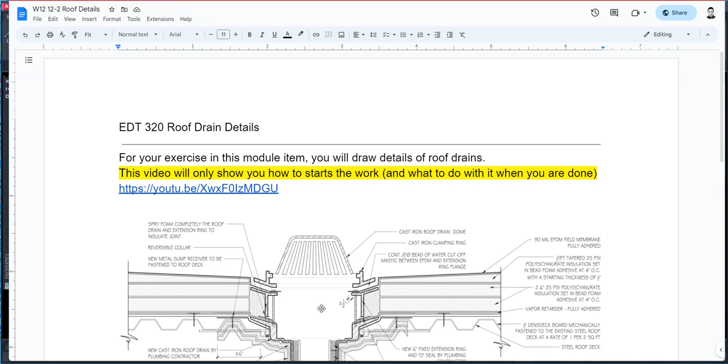Hello. The purpose of this video is to explain how to draw roof drain details by using a manufacturer's standard cut section of their drain. So, like what it says over here on the very top, this video will explain to you how to start it, how to draw it, and then how to finish it. But this video will not tell you all the things that you need to do. We've already done details when we did the structural details, and you're going to do the same thing.

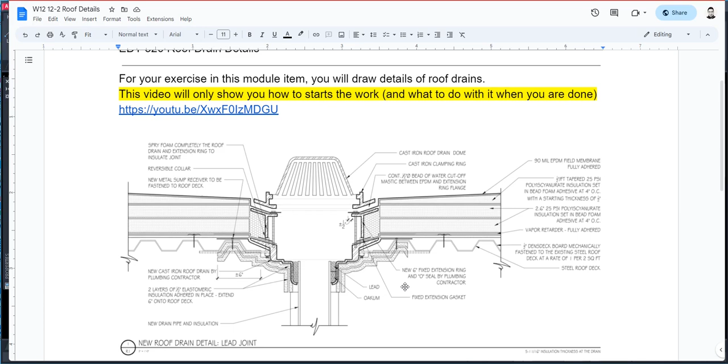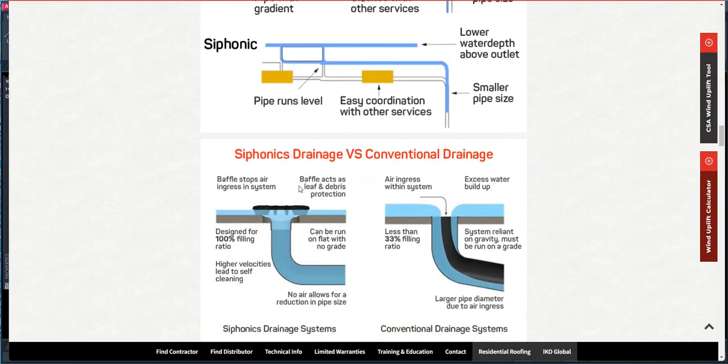When we go and look at roof drains, there are a lot of manufacturers of these roof drains. Okay, so let's look at some images here, and these roof drains need to be installed on our roof, and you can see some 3D drawings of how to install this on the roof. Let's see if I can click on this one and open it to see a better view. There you go. Here's maybe a better view.

On this view, you can see that the roof drain here is sandwiched between the roof sheeting and your styrofoam tapered insulation, and then you got your membrane. Okay, and so this is what you need to show, but we usually don't just show this detail on plan. So we can get a manufacturer's cut section and show details that look like this. So in this detail, it shows us the connection to the tube or the pipe work and how it's connected and what layers are connected to what.

As you can see here, let me click on that one too. Maybe it could give us a better drawing. Zoom in here. There you go. So you can see here, this is the manufacturer's cut section. And this one is installed on a roof deck. Ours is going to be a plywood.

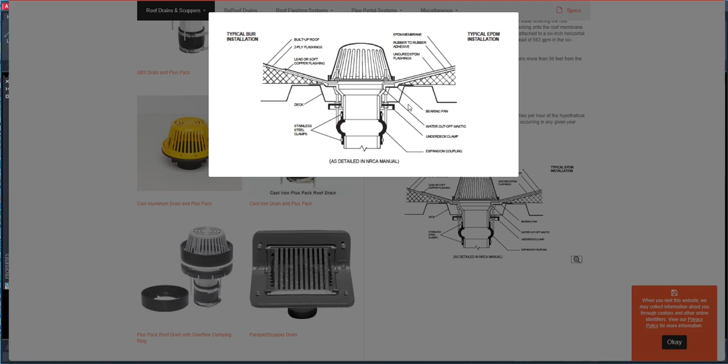Okay. And you can see that there's screws and the flange is pressing on this roof, on the steel deck, and that's basically how you tighten this. It's squeezing the roof sheeting, in this case a roof deck, and the roofing membrane here. Okay, it's called an EPDM membrane. It's an elastomeric membrane, and so that's what we use for roofing. Anyway, this is the section that you need to produce. Okay, so you can find a section to copy.

Okay, and here is a typical section that shows there's a roof deck below, and then there's some insulation on top. Then you got your flashing. Then you have another insulation on top. Then you got some rock beads. Here's another one where the drain is basically buried in rocks. Okay, so that's another one. Here's one that's exposed. Okay, so these are the typical details that we need to do.

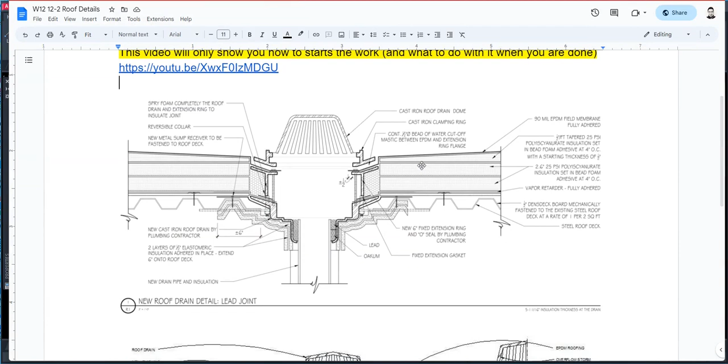All right. So going back to our drawing here, I put in some details that you can copy from. We just can't copy this roof deck because ours is not a roof deck or a steel deck. Okay, we have a plywood, and this one here would typically be our section, except that instead of saying that this is a steel deck, you're gonna say that this is your roof sheeting. So as you can see here, there's a tapered insulation here, and they hatched it like this. And then you have these three plies. Okay, so over here you have these three plies.

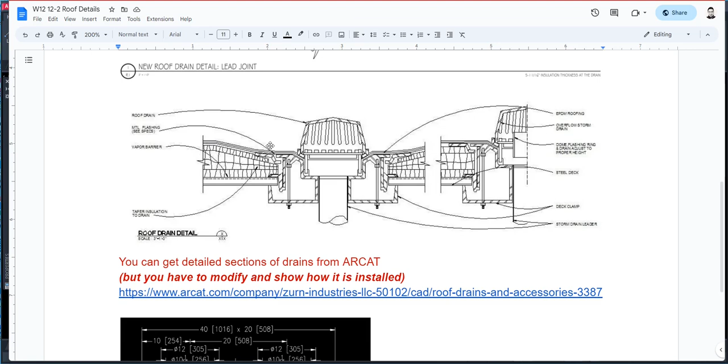Let me maybe zoom closer if I can. Can I still? Oh, yeah, I can. So you can see here that there's the first ply on the very top. Then you got your second ply, and then you got your third ply. So you got a third ply, and then it says that there's metal flashing underneath here. So you have to do that also, okay.

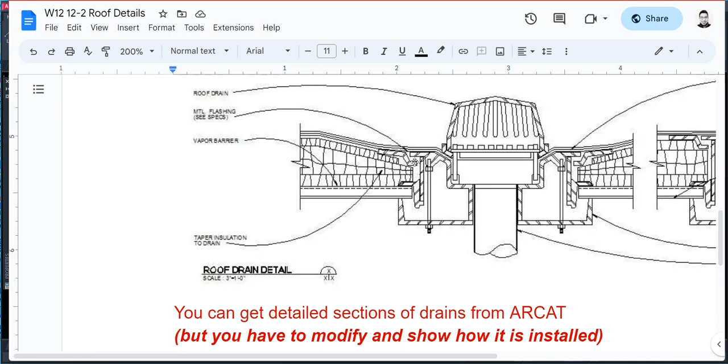Now, also when you're doing this detail, you can see some of the lines are thick, especially the topmost layer of roofing membrane and a section of your roof drain. Okay, so one of the best sources for manufacturer cross sections is ARCAT.

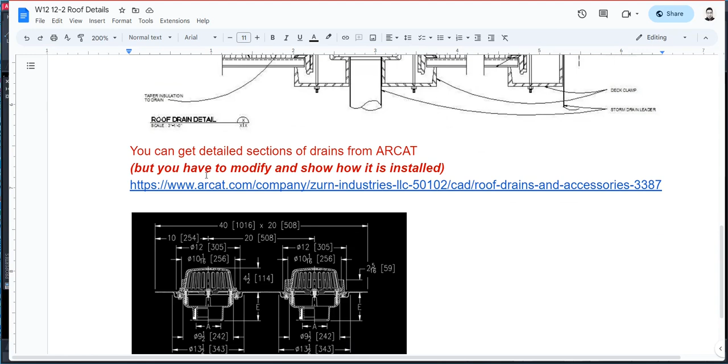Okay, so when you click on this one, I already have put in a link for roof drains, and our roof drain is supposed to be a double roof drain like this one here. Okay, this one is your roof drain and this one is the overflow drain, and you certainly can use this, but let's try to use something like this one here where the shield is outside, or this one.

And so you can do that if you simply download a DWG or a PDF. Okay, and when you download the DWG or PDF, you can see that these are all numbers here. Okay, and that's the measurement in inches and in millimeters.

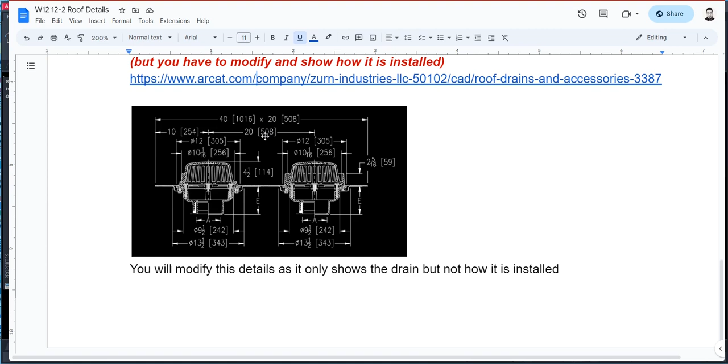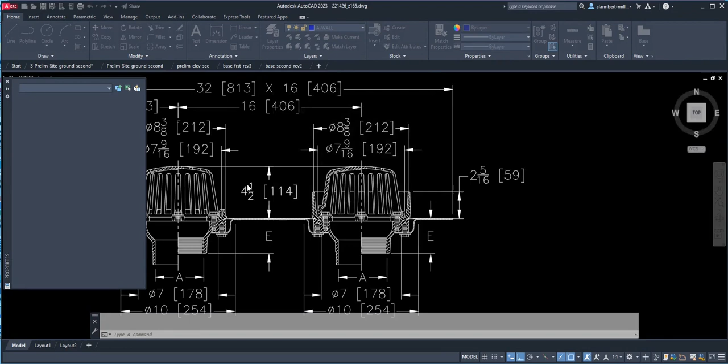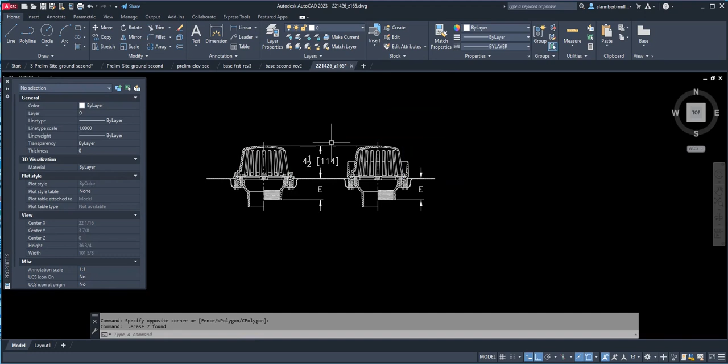and that's what it's going to look like. So what you're going to do is you're going to erase all of these dimensions. We're not particularly going to be using them. Okay. What you need to detail is the actual installation. And for this one, you may need to erase some hatch if they're part of that one first. So you need to move stuff because this one needs to be moved, or the insulation needs to be squeezed, and your membrane goes over here.

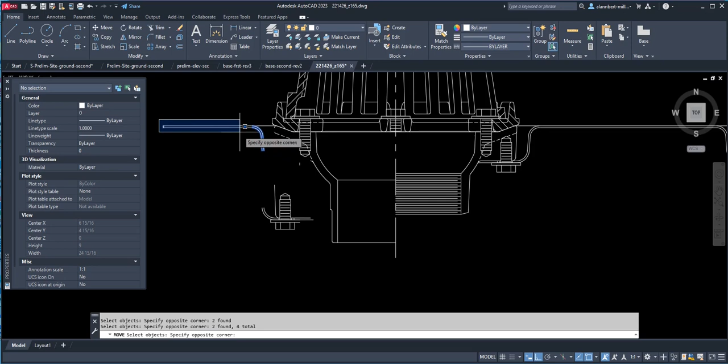Okay, so you need to move maybe this whole thing and this screw, and you gotta move that. Okay, we'll erase this detail, I mean this hatch. And then we have to move this also. I'll connect that to this one here. Okay, and then here, just erase this. So here's where you're going to squeeze your membrane. Okay, let's see this one. Oh, this one squeezes it in.

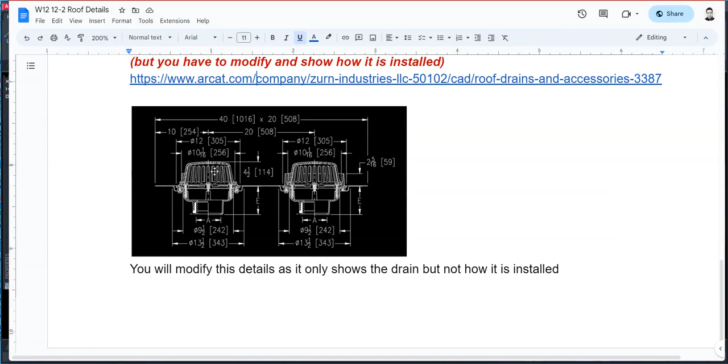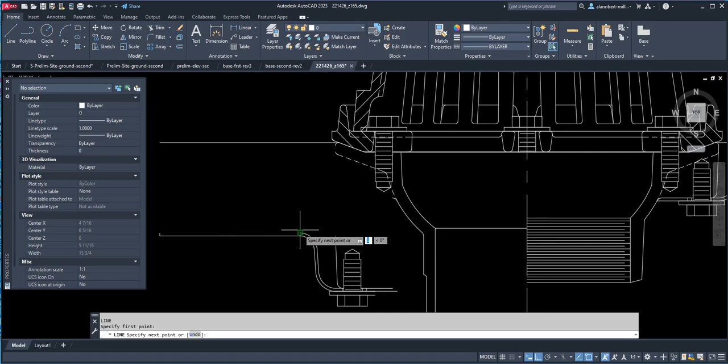Yeah, so you're going to squeeze that in there, and basically you're going to look at this detail here. Okay, so you can see that there's a screw here, and that screw tightens up against this flange over here. So one of the things that you need to do on your AutoCAD is show which one is screwed into which portion. Some portions you need to draw again, like that. And this is where your tapered insulation will go.

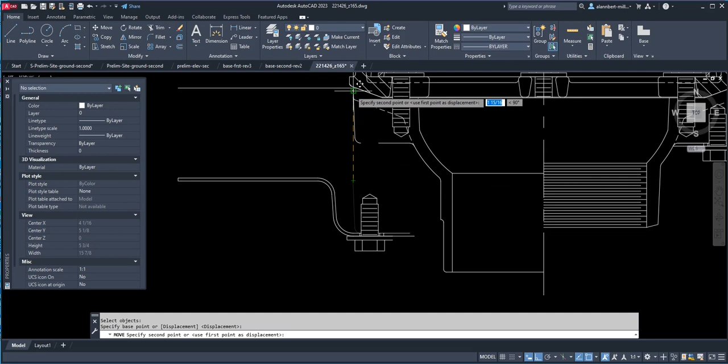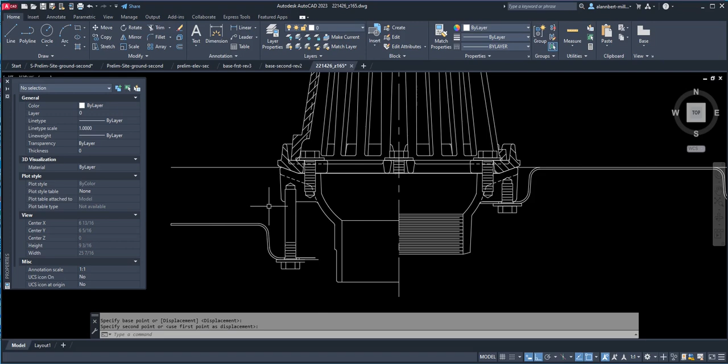Okay, and this one is connecting to this portion. Oh, this one is supposed to be on top here. There you go, and that's supposed to be screwed in to this one. Okay, so this one is squeezing this tapered insulation here, and you may need to stretch this screw or use longer screws to show that they are inserted here, because this portion is what you're going to screw into. So this flange here is the one that you're putting your plywood and your insulation in between. Okay, so that's something that you have to do. Simply follow this drawing here.

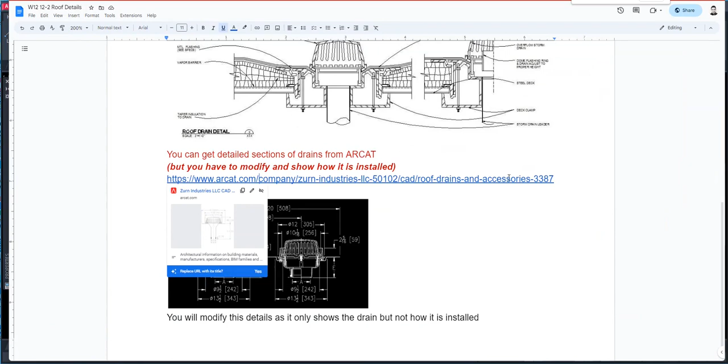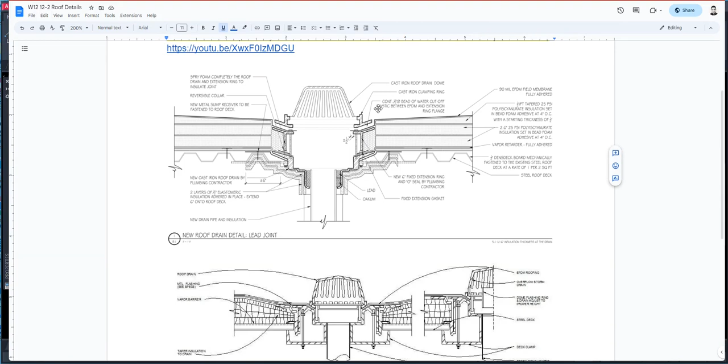Okay, you can see here also how that one is layered. So there's a layer here. There's 3 layers, and you're basically going to draw that in your AutoCAD, as well as putting in some notes, just like it shows here. You can say that this is the cast iron roof drain, and you're gonna call this out as a bead over here. Or you can be as simple as this one.

Metal flashing and see specs and roof drain here, or tapered insulation here. This one is more detailed. It points out what to put there, what is this part, and that may be too much. But you can just put it in like this, or you can copy this one. Now remember, you have here a normal roof drain, and you have here your overflow. So on your AutoCAD, you would have your normal and your overflow. And I think this manufacturer has one piece.

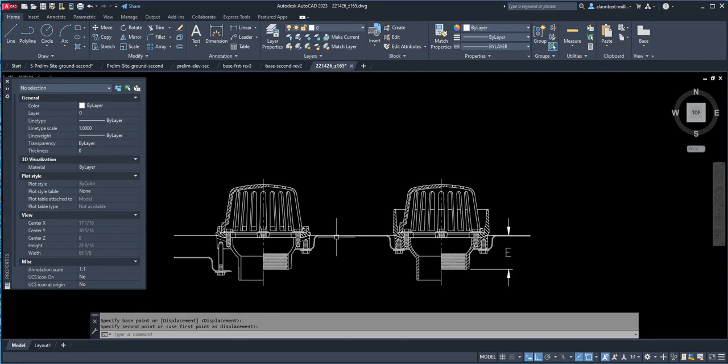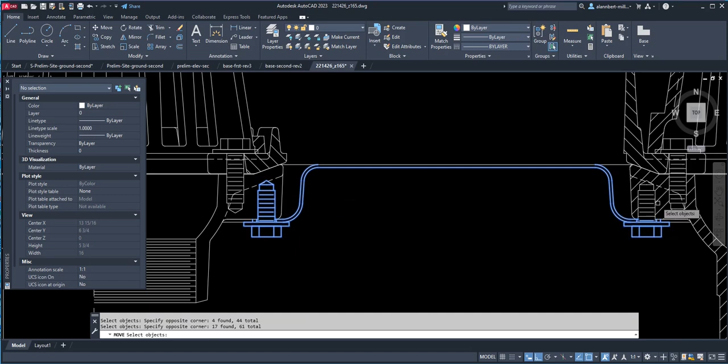Okay, one piece. So that means that this piece here has to be moved together. We're not going to move that. This one, we have to move them together. Okay, and you have to move that. You have to move this here. Yeah, move that together with this point here. There you go. Okay, and you can just draw that again. And then this one you have to stretch again.

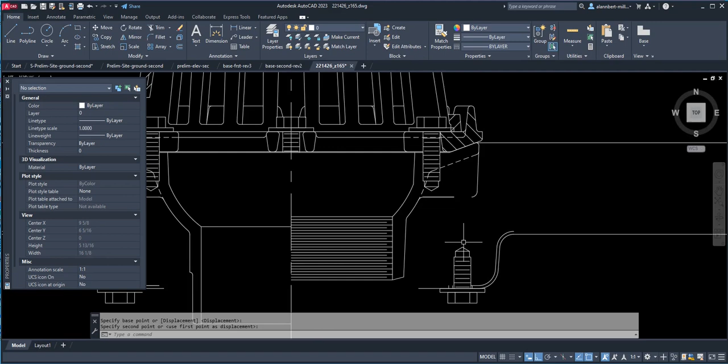Excuse me. Sorry about that.

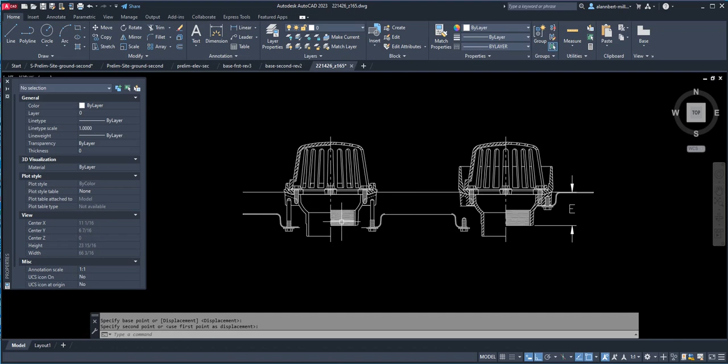So here you go. This one is just an option to show you that there's an option to screw in, or the other one is to basically seal that in. And that's fine. You can just leave it like that. It depends on which one they will want to do. So that's what you're gonna do for this one.

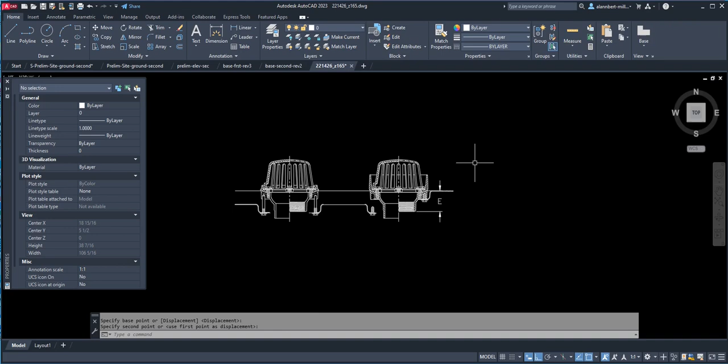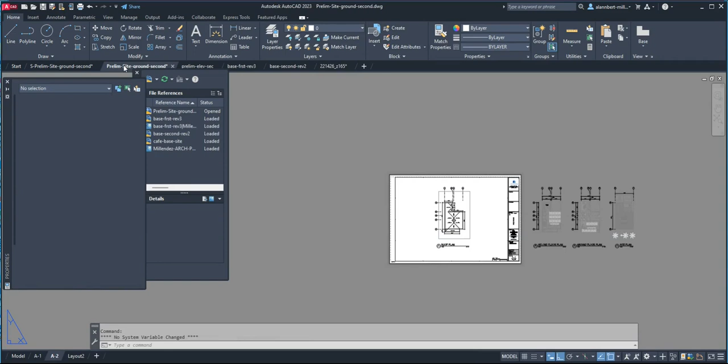And when you are done with this detail, you are going to put in our roof detail, which I'm going to show you next. So when you have finished your detail and made it look like this with the insulation, the sheathing, and some of the notes in your AutoCAD file, let's say this is now finished. You will go to your sheet A1, A2. It's still under the prelim because we haven't really finalized our drawing. We're going to finalize it.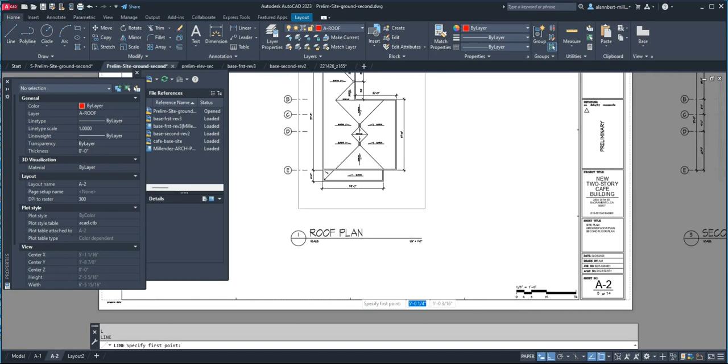It's actually always in prelim until you're ready to execute a construction drawing. So it's still here, and we did a roof plan on sheet A-2. Okay, and what we're going to do is we're going to move this, or the second line over here, or this mark over here. We're going to draw a line, connect that over here, and we're going to put that on layer viewport.

Let me switch to layer viewport. We're going to turn off layer viewport anyway, and then we're going to move this whole thing just before that line. This space here, we're going to put some notes on it later. So that means that we can put in some details here on some of these boxes. So I'm just drawing this line for division.

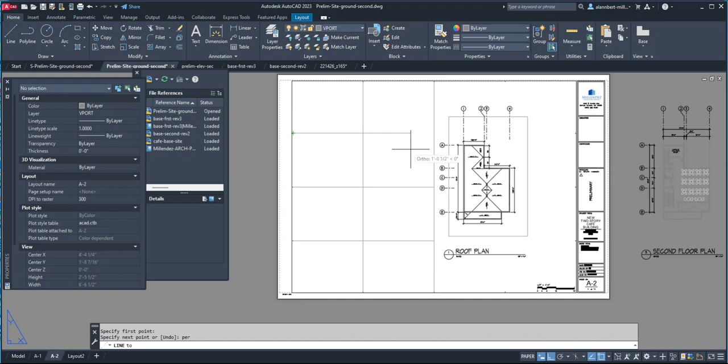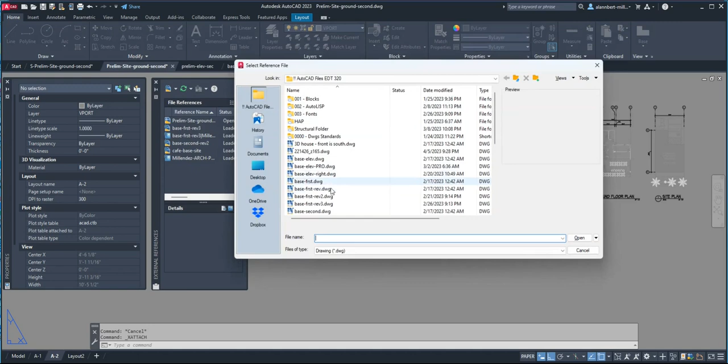And when you're ready to put in your detail that's already been finished, make sure you save. Make sure that it's also on the proper layer, or have layer pen 1 or color red. And when you're ready to put that in, we're going to use the xref command. So here's my xref box. Okay, if you don't see that, you just simply type in xref. And we're going to attach that file. We already saved it, so this is that file.

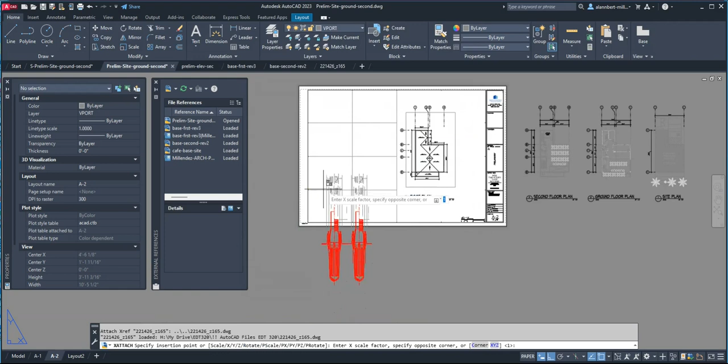And we're going to specify the scale on the insertion. So just click this one, and we're going to click 1. Relative path, and then OK. And then we are going to put it somewhere. Just put it somewhere here, and then type 1, enter. Okay, and then press enter again and click OK.

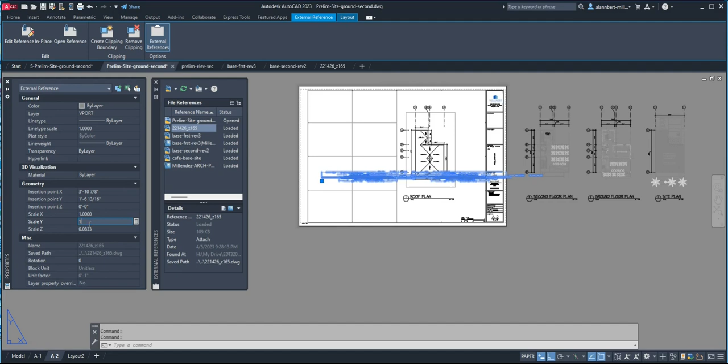And the drawings should, oh, they didn't accept our one. I wonder why. But anyway, it's already scaled. And so let's just change this to 1 on the property, change everything to 1. Okay, so that's how big the drawing is because when you drew it, it's a 1:1. So now we're going to scale that down, and you have to go back to our discussion on module 10 and then drawing scale factor table. So click on that one.

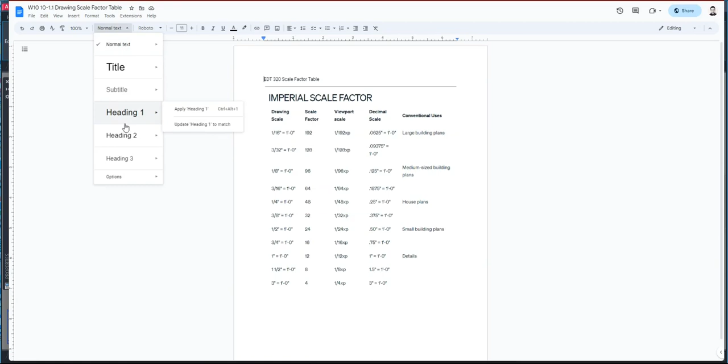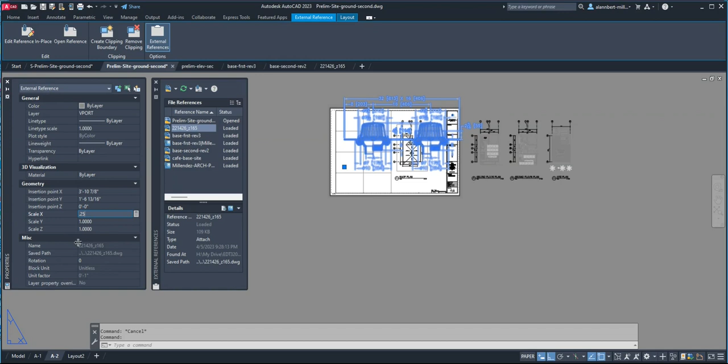It's under 10.1, and this drawing scale factor table will tell us the scale factors of our drawing. So the biggest one for the details usually is 3 inches equal to a foot, and the scale factor is this number, 1/4, which is 0.25. So let's go back to this drawing. When you click on that one, you can change this to 0.25 and everything else to 0.25. And let's see if it'll fit. If not, then we have to make it a different scale.

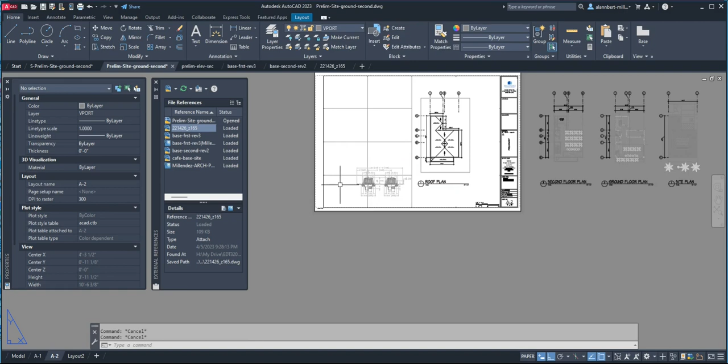Okay, so there you go. So that's 0.25. And if we move that, we might not fit that there. So it'll take like two boxes long. So we can change it to 0.125, and 0.125 looks like it's just perfect. Okay, so it depends on how big your drawing is.

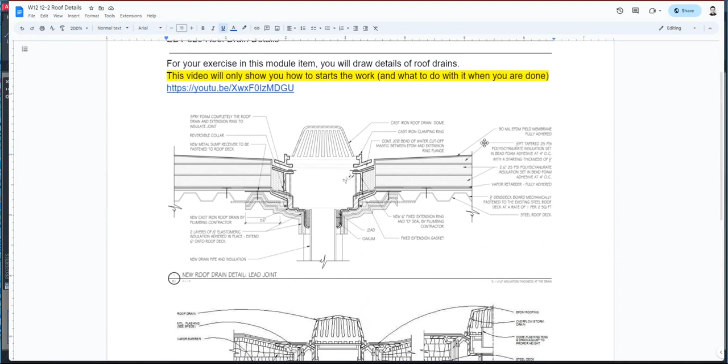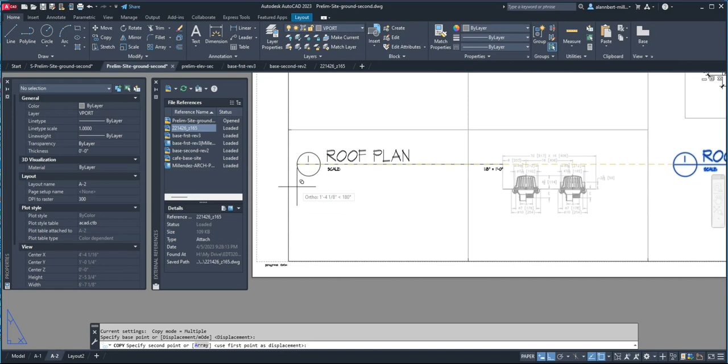Now remember on our old details or on our structural details, we will put these notes and leaders and arrows while in the paper space of our detail. So when you put this in here, you still have to put in your notes while here. And then we're just going to copy this and put that. Let's just move that here a little bit so we can stretch, just like we did on our structural details. That one, okay. And then we're going to call this drawing number 2.

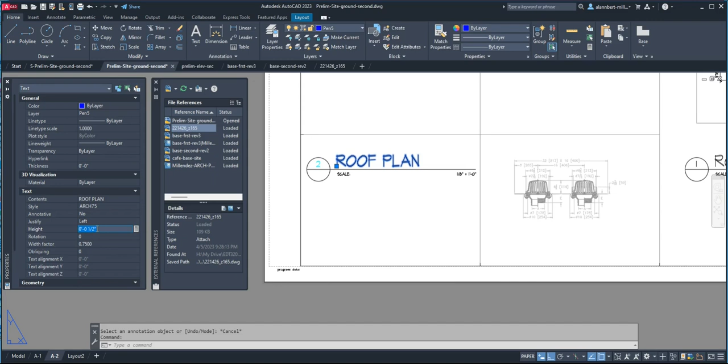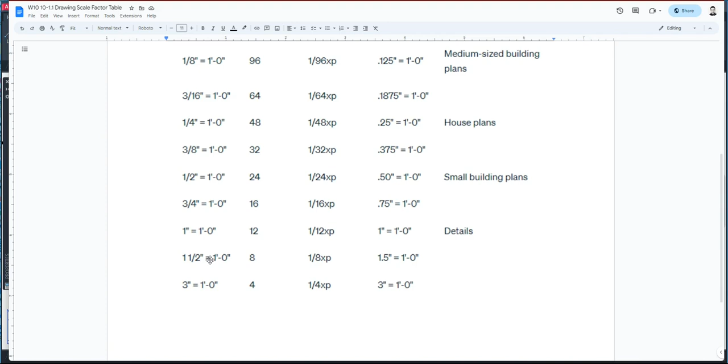And then we are going to change this, the height is I think 1/4. And then this is not 1/8, this is 1 and a half. So 1 and 1/2 inch is equal to a foot. Okay, so if you look at our drawing scale, if you use a 1/8, which is 0.125, then you're using the scale over here. Okay, so we are simply going to change that and then move that into place.

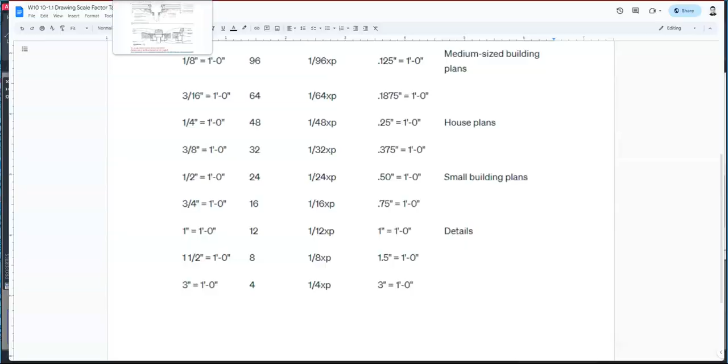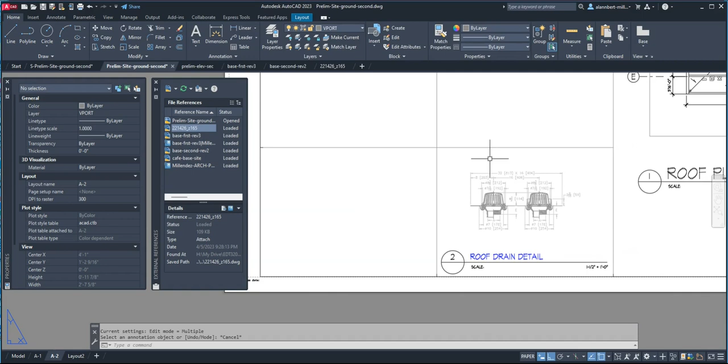Okay, and then you're ready now to put your notes as you see fit here. So whatever you drew, you're gonna label now on your CAD drawing and create your roof drain detail. Okay, so you're gonna put your roof drain detail. Remember this is not finished yet. You have to finish it on your own. This one is just straight up whatever I got from the manufacturer. I haven't done it yet. You're supposed to do it by yourself for this module. And that's what you're going to put on sheet 2.

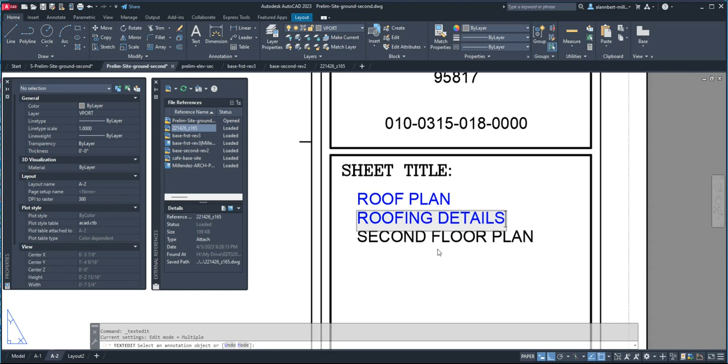Make sure that you also change this. This is now a roof plan, and we're going to change this to roof details or roofing details. And then we don't need this anymore. There you go. Okay, so you just made your first roof detail here. We're going to do another one here on our next module item. Okay.